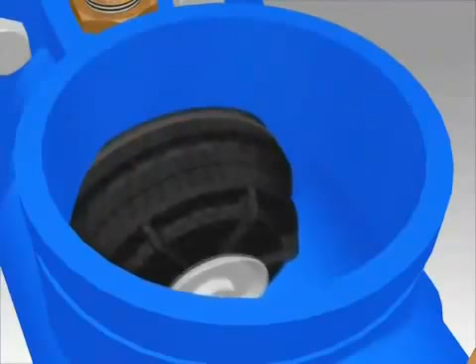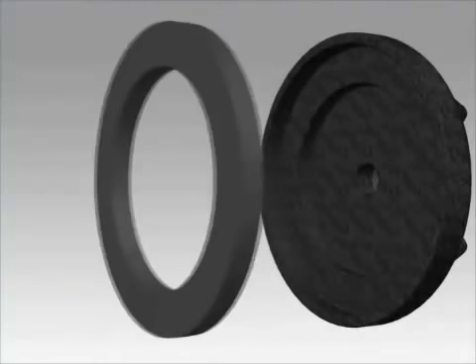Always service the checks one at a time to avoid mixing parts. Both checks can be repaired following the same procedure. Remove the nut from the poppet retainer on the check, then remove the retainer. Remove the seal ring and inspect the face for cuts or embedded debris. For a temporary fix, you can flip the seal ring over to use the smooth side while waiting for new replacement parts.

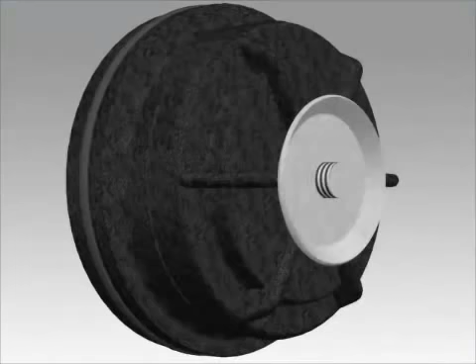Inspect the sharp edge of the seat with your finger for any damage. Inspect the O-ring around the edge of the seat for debris or damage. Replace any damaged parts. If you are installing a repair kit, replace the seal ring, seat O-ring, and stem O-ring. Reassemble the check and tighten the retainer nut. Clean and inspect the O-ring sealing area in the body. Next, you will lubricate the seat O-ring.

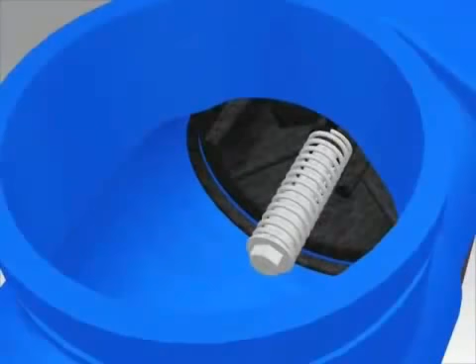To remove the number 2 check valve, locate the 2 tabs of the plastic retainer at the top of the number 2 check. Grasp one of the 2 tabs and push down to remove it from the groove. Then pull straight back and the retainer should spiral out of the groove. Remove the number 2 check by pulling straight towards the center of the valve.

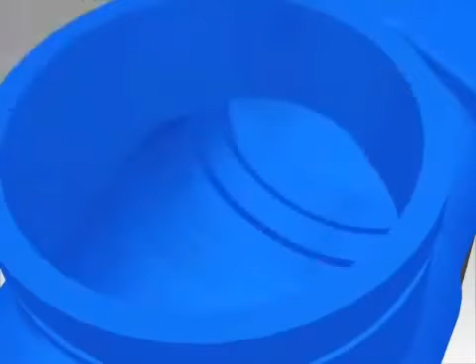After servicing the number 2 check, install it in the body, making sure it is completely seated. The groove for the seat retainer should be completely exposed. Close the number 4 test cock to hold the check in place. Install the plastic retainer by inserting one end into the body groove and then sliding your hand around the face of the retainer, pushing it into the groove as you go.

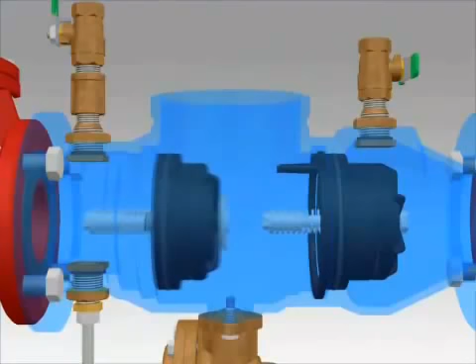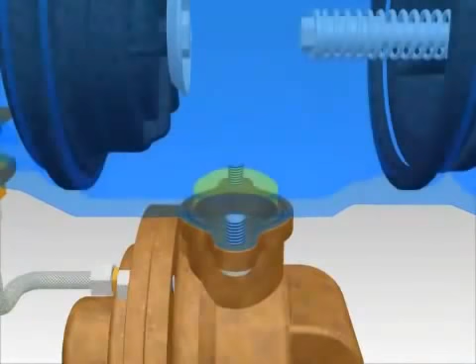Install the number 1 check in the body and close the number 2 test cock to hold the check in place. Install the plastic retainer by squeezing the ends together and placing the lower part of the retainer in the groove. Push the upper part of the retainer into the groove until it snaps into place. Place a rag in the body opening to prevent any objects from falling into the relief valve.

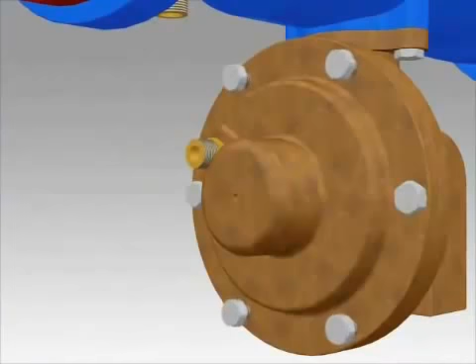Before servicing the relief valve, make sure to check the troubleshooting section of the instructions. The most common cause of discharge from the relief valve is debris in the number 1 check valve. Unscrew the pressure sensing hose from the relief valve cover fitting. Unscrew the bolts from the relief valve cover counterclockwise. The cover is spring-loaded, so leave 2 bolts opposite each other to remove last.

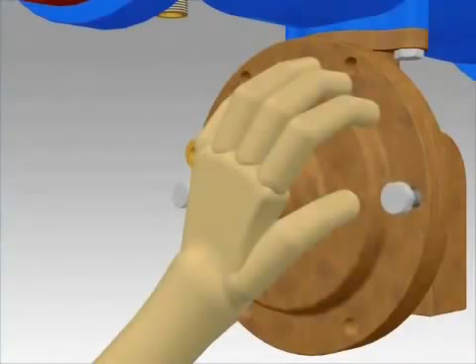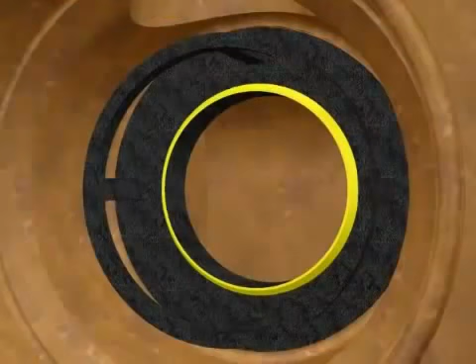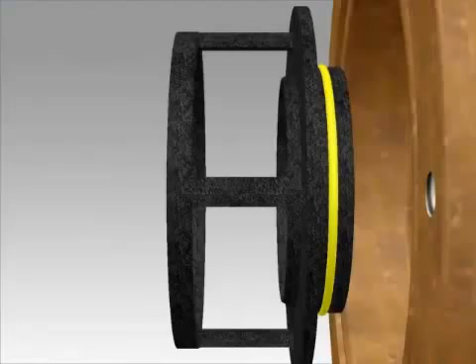Hold the cover tightly in place as you remove these last 2 bolts. Pull the cover straight away from the valve body. The relief valve cartridge will stay in the cover. Remove the spring. Inspect the sharp edge of the seat with your finger for any damage. A damaged seat can be replaced if required by pulling the seat straight out of the body. Make sure to lubricate the O-ring before installing a new seat.

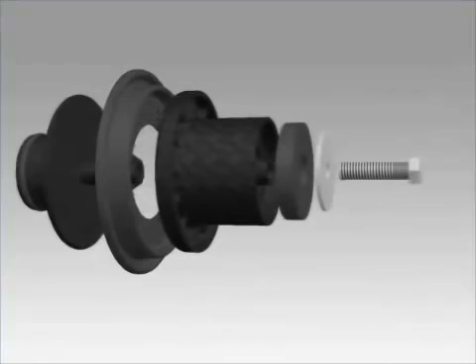Gently pull the cartridge from the relief valve cover. Inspect the seal ring for any cuts or embedded debris. You will want to disassemble the cartridge by unscrewing the seal ring retainer screw. Inspect the diaphragm closely for wear or holes. Inspect the O-ring on the upper plunger for any cuts or damage. Remove the seal ring and inspect the face for cuts or embedded debris.

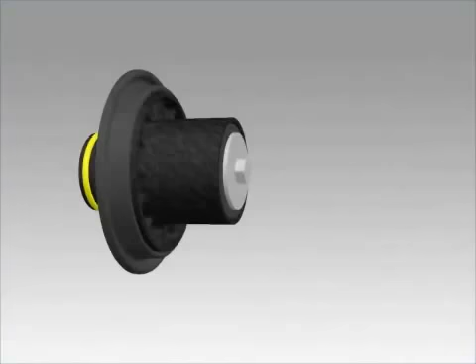Clean the components and replace any damaged parts. Next, you will want to carefully reassemble the cartridge and tighten the seal ring retainer screw. Lubricate the O-ring on the upper plunger. Place the spring around the seat and the body. Insert the cartridge assembly into the spring.

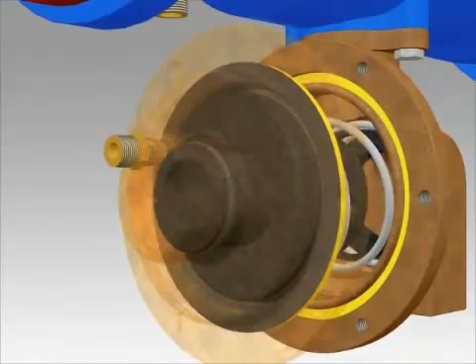Place the cover onto the cartridge assembly and push the cover towards the body. Make sure the cartridge centers into the seat guide ring and the bead of the diaphragm fits into the groove in the relief valve body. Align the hose fitting on the cover to the left of top center. Thread 2 screws into opposite holes by hand while holding the cover in place.

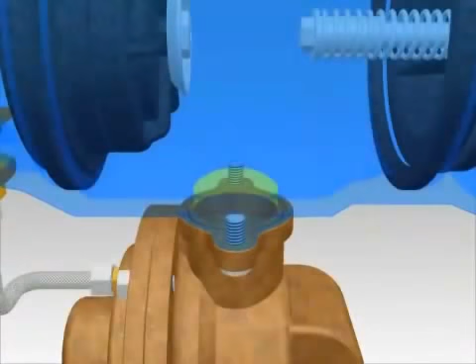Thread the remaining cover screws into place and tighten all screws evenly. Thread the hose onto the fitting on the relief valve cover and tighten with a wrench. Remove the rag in the body opening. Place the groove coupling gasket over the valve opening. Lubricate the outside of the gasket. Replace the cover and reassemble the groove coupling.

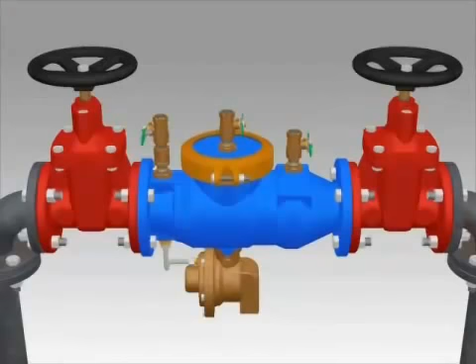Make sure the coupling is seated properly and the ends of the coupling halves touch. Close the number 3 test cock. Open your inlet valve slowly to pressurize the assembly. Inspect for any leaks. Open and then close test cocks to bleed air from the assembly. Open your outlet valve a small amount and wait for the system to pressurize. Fully open the outlet valve once the system is pressurized. The valve should be tested by trained personnel to confirm that it is working properly.